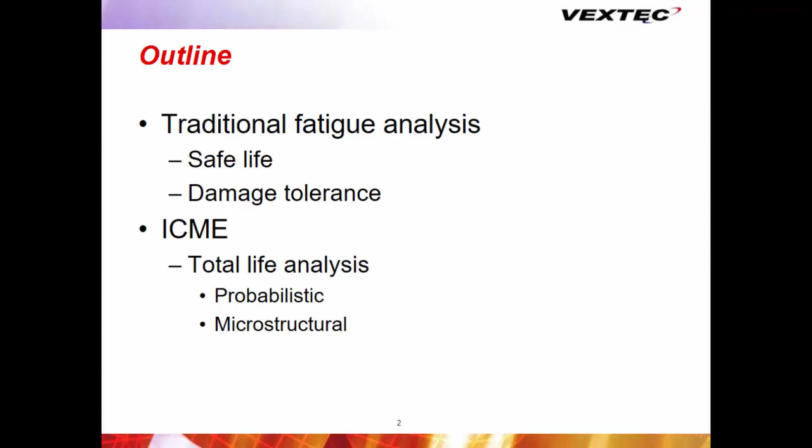So with that, I'm going to go over very briefly the traditional method, which you all know: safe life and damage tolerance, and how those work into an ICME-based method, which is more of a total life method. In ICME, ideally you're going to model the material as an initial set of discontinuities. There's no equivalent initial flaw size. You're trying to model what's fundamental in the material itself, and how that culminates in the generation of dislocations, fatigue cracks, and so on.

So the traditional safe life method, going way back, is we pull on a bunch of smooth round bars or notch bars. We plot those against stress, and then we find some life as a function of stress and/or strain. One of the problems is there's a lot of scatter. Even if I take a smooth round bar and polish it the best I can, I've had graduate students do all the polishing they can just to get a mirror finish, and I can still have huge orders of magnitude difference in something as simple as a smooth round bar. I can have 1, 2, or 3 orders of magnitude difference in life on what I think is an ideally similar bar.

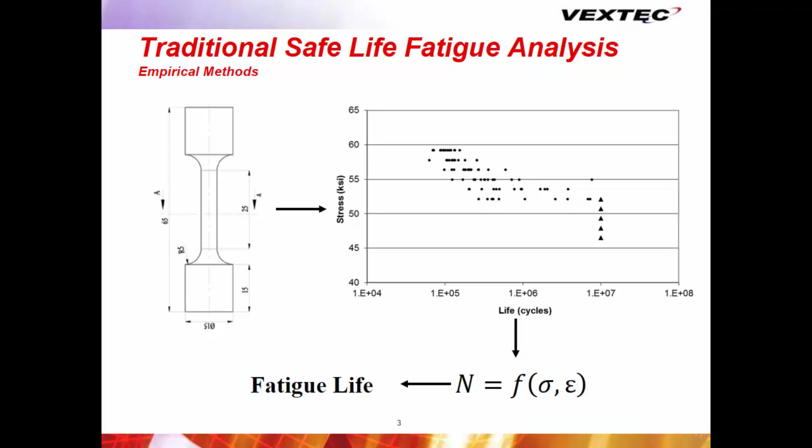And that's because stress is maybe not always the fundamental driver for what drives fatigue itself. So if I go back - and I'm not a fatigue guy, I had to learn this in the field, I worked for Ford and GM, they just stuck me in the fatigue group there - I dug up my undergraduate book on fatigue, which was Professor Shigley's book.

If I go to page 188, Professor Shigley said, as an undergraduate, I need you to understand that if you find the fatigue strength of a test component, which is S sub E prime, and you want to relate that to the fatigue strength of what you're putting out in the field, well, here's the equation he has on 188. There's all these knockdown factors - all these rules - and he says in the text you will learn there's very little correlation between what that bar tells you and what you're going to experience. So he says you're going to spend your life trying to figure out these Ks, and that's what every company does.

So it worked at Ford and General Motors - we had different Ks. Basically our design system, our standard work design, is understanding these Ks. And these Ks aren't always based on science, they're based on our experience. We had a certain failure many years ago that got a K driven to this, and now we're going to use that K, and then that person no longer works there, and I don't know where that K came from, so we're going to lose that K. It's just constantly rolling around to reinvent the Ks. And it keeps us all in business, so it's not a bad place to be.

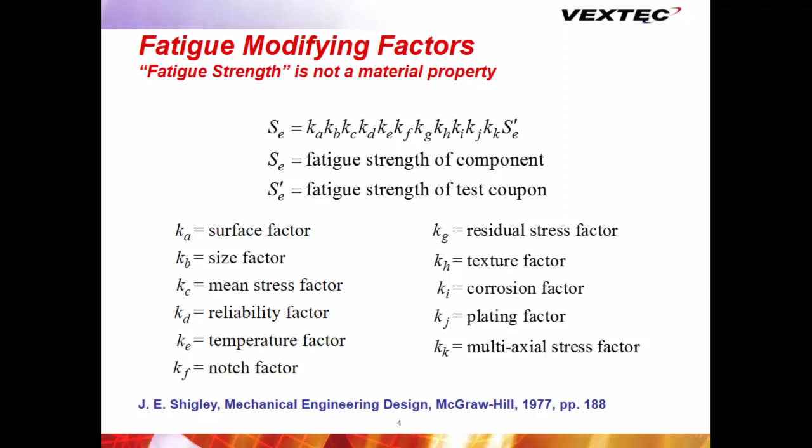And we're going to do that, and then they keep saying we want it lighter, we want it hotter, we want it cheaper. So then these old Ks don't work. If you want to make something lighter, I'm going to make it out of aluminum instead of steel - okay, now I've got to go figure out all my Ks again. So is there a better way to do this? And that's where the whole concept of ICME comes in. So here's another thing.

So why should I, when I put a notch in a bar, why should it change the fatigue strength? Well, because the fatigue strength is not a material property. The SN curve is not a material property. I don't have an SN curve for steel, I've got an SN curve for steel with a notch in it. If I change the notch size, I get another SN curve. So we have to get out of this thought that there's an SN curve or an endurance limit for a material. No, that's dependent upon all of those other K's.

Now, indeed, we've got Glinka methods, we've got Neuber methods to capture notches, but still I have to do tests. To get my parameters in those, I've got to test, and I've got to test multiple notch sizes and stuff. So it boils down to I have found ways computationally of accounting for notches by doing tests.

But can I capture that scatter with tests? Because if I look at my smooth bars, ideally, there's places where I've got a lot more scatter than on my notch bars. And I understand that the notch bars have got a lot less area being stressed and stuff. So I have a basic understanding of that. Can I put that in a computational form?

In other words, can I model a notch bar and a smooth bar with the same material properties and get the correct answer? Can I capture the notch? Can I capture R ratio? Can I capture even corrosion fatigue? Can things come in there? And ideally, at a mechanistic level, if I understand the mechanism, which we often do, we spend a lot of time understanding damage mechanisms, how can we work then to a computational, integrated computational framework?

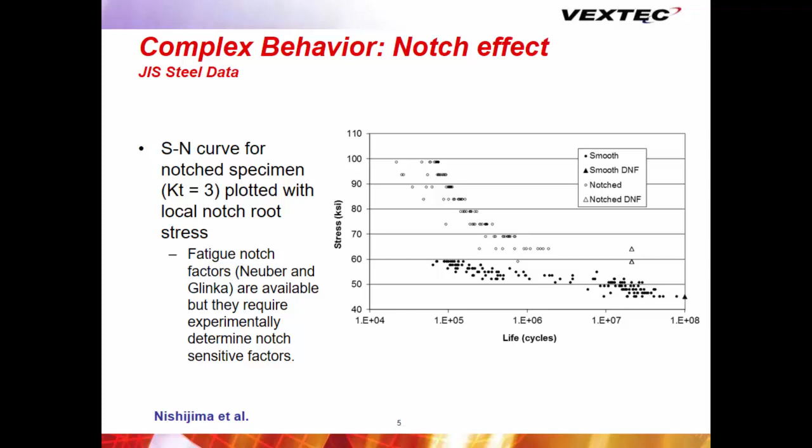So it becomes very important, especially when we're going from these very small test specimens to things like bridges and other big things. But the flip side, going from a test specimen of a solder joint down to the solder joint that exists in an integrated package, where there's a huge difference in those sizes too, going down the other way. So how can all of these things be captured as intrinsic material properties?

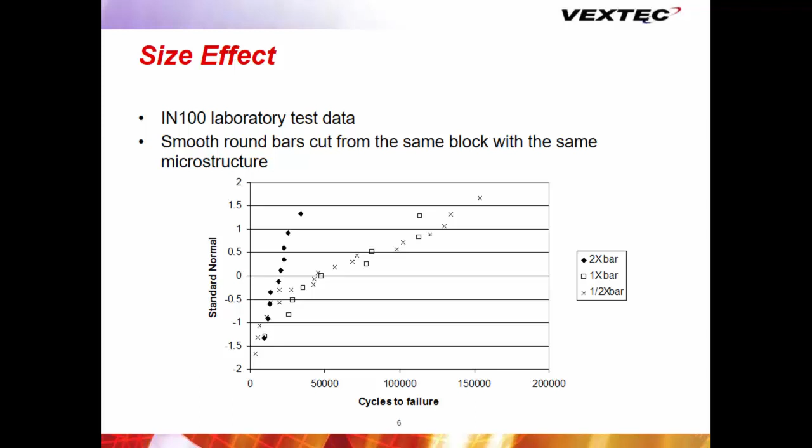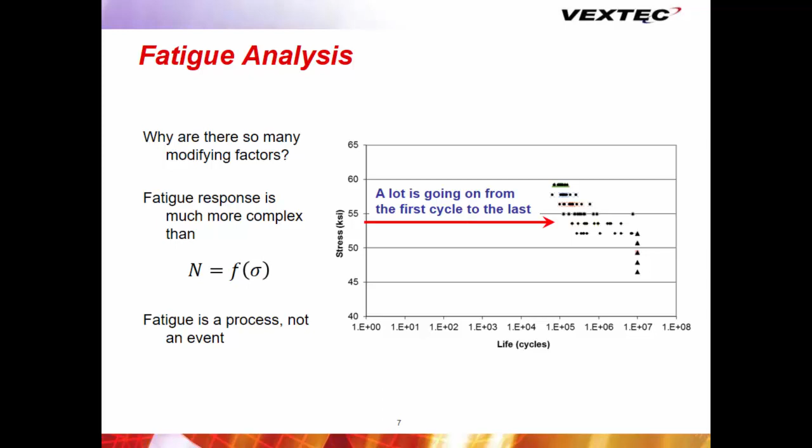And so what's really going on, which is what everybody's talking about, what the Professor talked about, is really there's a lot going on between when I first load that thing and that thing cracks, or I get the failure in the SN curve. And to understand that SN curve, I've got to be able to model or understand what's going on. So fatigue is a process, it's not an event, it's not that I hit a 5% load drop. There's all this stuff that's going on, and can I understand what's going on to get me to that end event? And then maybe I've got a chance of capturing why those dots there are where they are. And that's the whole concept behind the total life analysis, all the work that Professor Topper has spent his life on, the work people were talking about here earlier this morning, understanding the fatigue process.

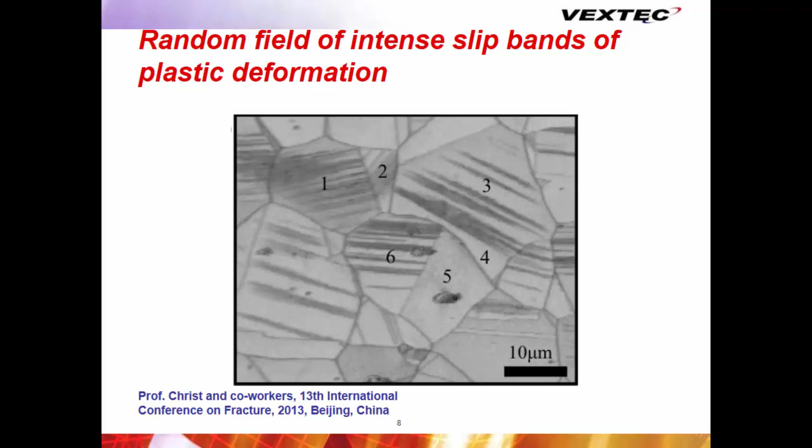All those things are available using statistical volume methods, which have been around for a number of years, but they've become much easier to use now that computers are faster. So we actually have the computational capability to run models of something like this, modeling 100 million grains. A piece can have 100 million grains in it. If we look at it statistically, we can actually model 100 million grains because you're not modeling each grain, you're going to the tails of your distribution and actually doing models of those tails.

And then here's another example. This is a bolt hole in a longeron on an aircraft, and you see there's a bunch of little dinky cracks. Aluminum 7000 series, that's how it accumulates damage, it's got a bunch of little cracks. This is going to pass inspection. This is a perfectly good hole.

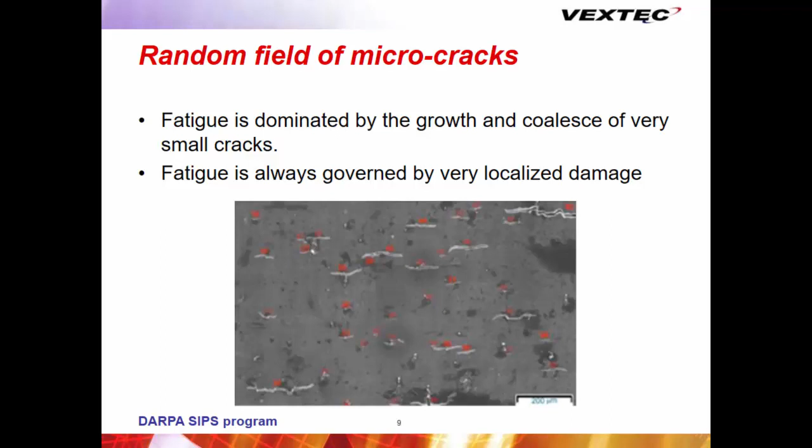And I know most of you are driving home this evening, but for us that are flying home, this is what we're flying on. They're there, and we allow them to be there, but we need to understand them to life that aircraft. We don't infinite life airframes, they're limited life, we inspect them, they're damage tolerant, but understanding what's going on here is necessary to understand when I need to do the inspection on that aircraft. And we can model this. If there's a whole bunch of cracks on that aircraft, billions, can we model billions? Well, actually we can, using statistical methods.

And then here's another example, kind of from that first one. Here's a crack as it starts to get long, but it still recognizes that the microstructure is there. As a matter of fact, the microstructure is going to drive the crack growth until the process zone, the plastic zone, is so big that it can average out all those microstructural inhomogeneities. But at very low loads, it might always be microstructurally driven. The important thing is not so much that it's got this tortuous crack path, but that tortuous crack path drives the rate. So two of these cracks can have much different numbers of cycles to get to a certain small size, because of tortuosity.

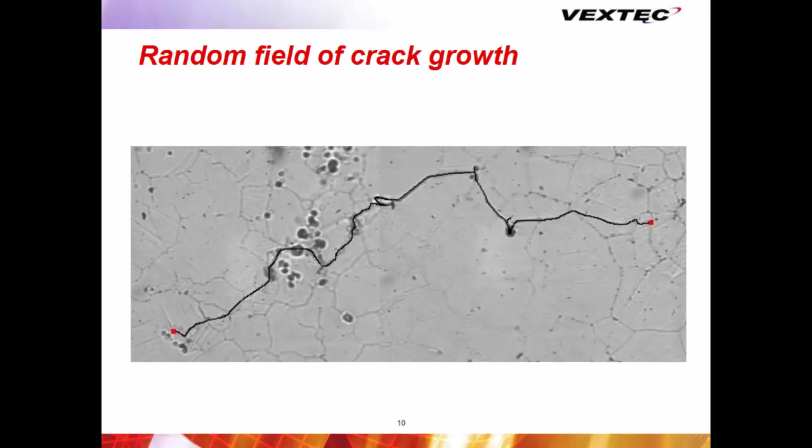One of them could take one path, one takes the other path, and as you know, driving around Detroit here, the path you take determines when you're going to get there, and that's true for these cracks also. So can we handle that? Well, using statistical volume methods, yes, absolutely, and it's fairly straightforward. The hard part is to create the statistical volume method, or the software to do it, which people have done over the years, and then it becomes engineering knowledge. What rules do I need to put in there that are going to allow a crack to look like this?

So that's where the computational material models come in. These computational material models actually try to model the material at some fundamental level. So if slip's driving the thing, let's look at slip. If voids are driving the thing, let's populate with voids. If it's voids and slip, put all of those fundamental discontinuities in the model and let damage grow from each and every one of those in this system reliability type model. So it's important that we get the randomness. Size is very important; the larger something is, in general, the lower its life is.

But using this, we can go back and look at our test coupons. We can take data from the test coupons, not just the end life, but look at the fracture surfaces, understand where the crack started from, and we have that now. We have automated methods to put our specimens in these little RoboMet type things, and it'll go through and scan the fracture surface for us and give us that. We've got a lot of methods out there that can automate this.

So take that one bar that we broke, and that's a jewel. There's all kinds of data in that one bar. Look at striation spacing, you know, some of that stuff can be done now. It's much easier to do now than it was 20 years ago. And take one broken bar, but just wring all of the information out of it and make sure all of that information gets into our fatigue model.

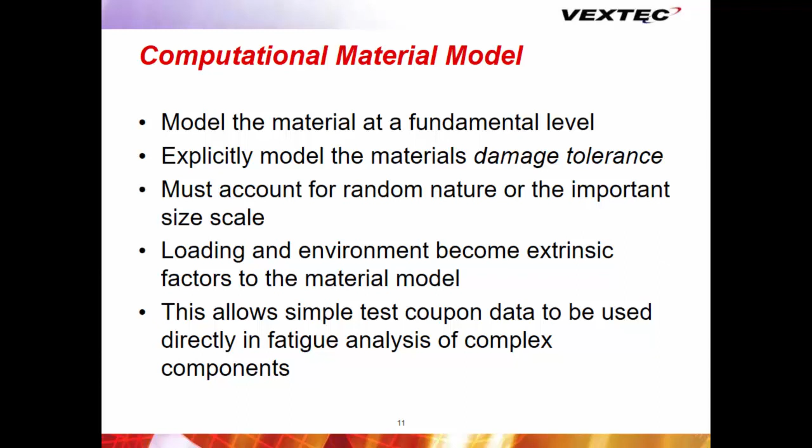Most all of these methods are damage tolerance based. They're not linear elastic fracture mechanics, but damage tolerance based, where you're actually modeling cycle-by-cycle the damage that builds up. The reason they're not linear elastic fracture mechanics was shown this morning - that could be the last 20% of life, and for nickel alloy it's the last 1% of life. So by the time you get to a large crack, you can be almost over with life.

So if you want to capture that 80% that happens before then, you've got to use small flaw fracture mechanics, dislocation theory, crystal plasticity. All those models are available, and the journals are full of all kinds of models available for us. How do we take that knowledge and put it directly into our fatigue modeling?

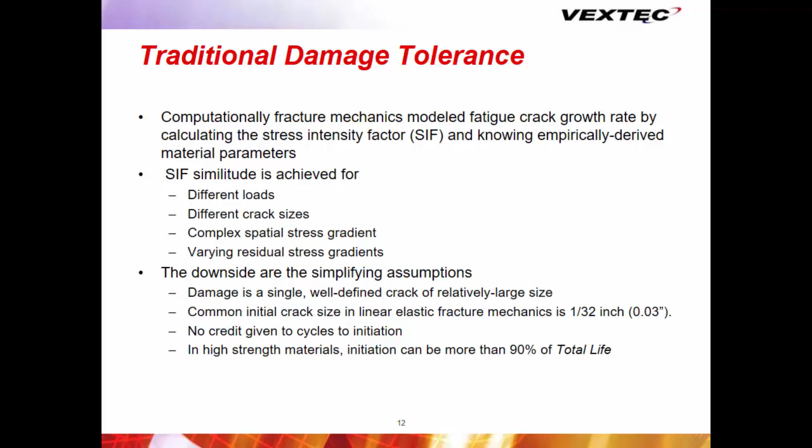So kind of the way to do that is - here's an example of a statistical volume element, a little chunk of material. It's got say 500 grains in it, and those grains all have their own orientation. There could be voids in there, hard inclusions in there, whatever they are.

But they're statistically defined, so if I take my next chunk of material, it won't look exactly like this, but the statistics will be the same - the mean grain size is the same, the scatter in grain size is the same, as long as I'm in the same region. If I get to another region, especially in a casting, I might want to change up the statistics in my statistical volume element.

But that element's available as an element, and then I've got crystal plasticity, dislocation theory models that allow me to generate plasticity through a dislocation. I was going to say Bilby-type models, Tanaka and Mura, the stuff that Keith Miller worked on for many, many years. There's many models out there.

The difference is that this crystal plasticity happens over a single grain. It hits a grain boundary, it's going to get pinned to that grain boundary, but then it's going to go on to the next grain boundary and the next grain boundary. And that happens over and over.

And then there's small flaw fracture mechanics. So in a nickel alloy, you might define your initial crack as when it busts through the first grain boundary - that's your initial crack size. So you've got these very, very small cracks, but you've got to use small flaw fracture mechanics to get those to grow. And finally you get to linear elastic fracture mechanics.

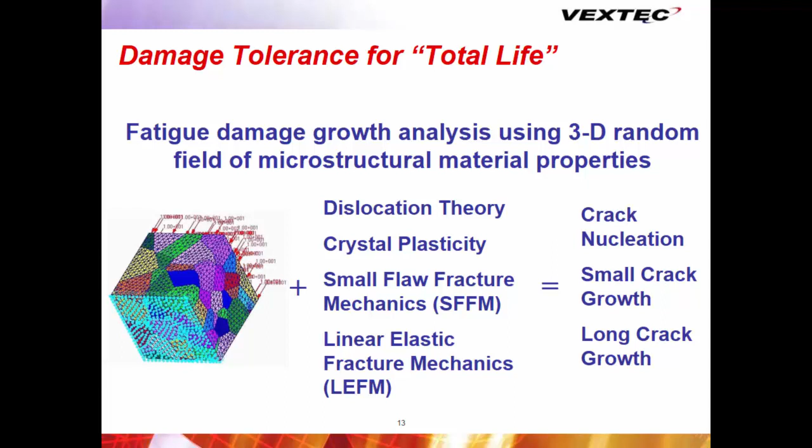In some components, that's a long time. In aircraft, we design to give us a long crack growth life because we're going to go look for cracks. So once we find them, we've got to have some life after that. Other components, we don't have any life, or we aren't going to look. So do we really care what the long crack growth life is if we're not going to use that in assuring safety?

So very, very quickly, I think it was talked about early - all of these models are based on what's going on in front of the crack tip opening displacement. How much is that crack? What's your delta crack tip opening displacement? So closure comes into these models. Overload, if I get an overload, it's going to hold the crack down. So it's modeling the plasticity in front of the crack, and that plastic zone goes over multiple microstructural features.

So it's the microstructure that exists in that plastic zone, and that plastic zone could vary depending upon your math. Up close to the crack, you could have one set of plasticity. Further away, you've got another set of plasticity. Finally, you get the elastic region, which sits out there.

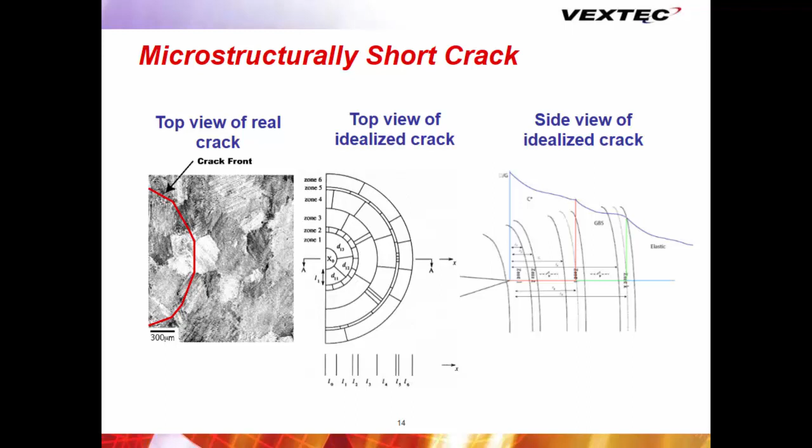Again, there are many models for that, and what goes on in aluminum is different than what goes on in steel. Stainless steel is different than martensitic steel, but stainless steel is very close to what nickel and aluminum is, actually. But people know how that plasticity forms, and there's computational models out there that allow that.

And so kind of how that works is you can take your finite element model, and at each element in your FEM, you kind of find a life for that element, and then you look at the other elements, and that can roll on. But the important thing is you get down to the end where you've simulated many of them - you can start to simulate what you expect to see in a fleet of these.

So if I make 1,000 of these, when do I expect the first one to fail? So that's kind of there. But the other important thing is, if you're an FE Safe user, which you are in this room, can I use this to take a small amount of test data and simulate a large test program?

So I'm going to go around and bust 5 bars, but I'm going to look at them very closely, see what my failure mechanisms are, and then simulate those using engineering knowledge.

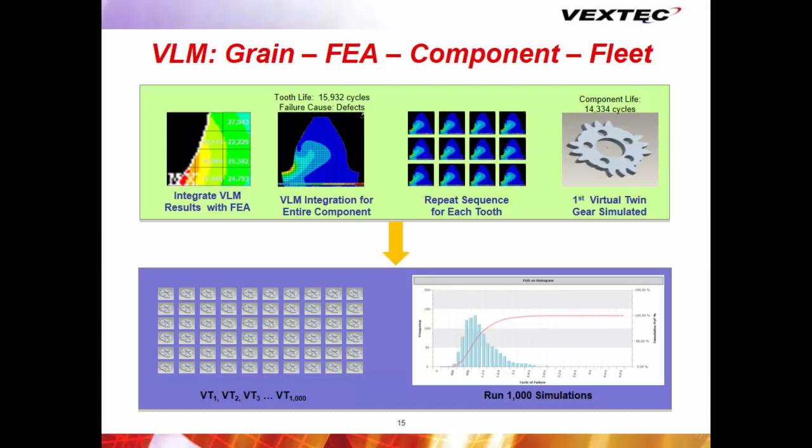I know I can have a casting pore as big as X. Let's put one in there per cubic foot of this stuff and see how that drives things. Things I can never test for because I can't test that many bars, I can do that and create my SN curve.

Can I take a few bars, look at them very closely, and using these methods simulate a bunch of bars? Can I capture my -3 sigma curve, or my B10, whatever is in my standard practice? Can I knock down the amount of testing I need to do to get the data to go in my standard practice?

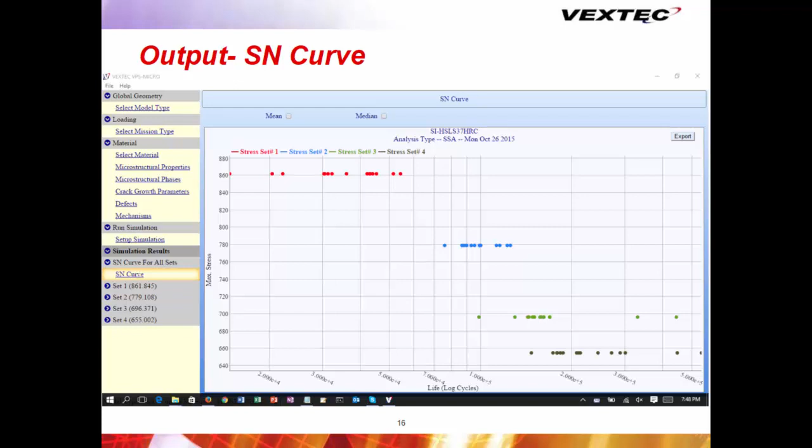So you have to change up the entire practice to use ICME and say, okay, I'm going to do X tests, and those are going to cost me a lot of money. Well, for just a few dollars more, I can look at those much more closely, and get myself a much richer database, even a safer database to put into my traditional standard design practice.

Because this is a simulation, we're going to simulate those outputs. What does the fracture surface actually look like? Well, it's a simulation, you've simulated that. So the simulation output is going to tell you, okay, I've got a grain over here and it's at a really high orientation to my applied load level. It's a very strong grain, or I've got a pore over here that was in the crack path, and I can compare that back to my actual fracture surface.

And this is where the V&V comes in. How do I validate? This is a pretty high level. Does my simulated fracture surface look like this? This is the crime scene. Can I match the crime scene? And if not, at this level, I can go back and I've got to tweak my analysis, but I need to match this crime scene.

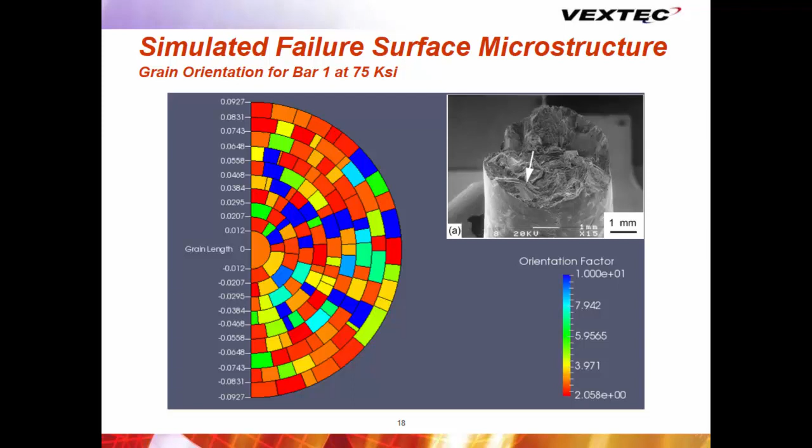If my fracture surface, stochastically, not individually, but if I don't capture the proper statistics like the initial pore size where the crack started, all of those things can be captured, and I go back and calibrate my model such that I capture this. And then I can start looking at my crack growth rates themselves.

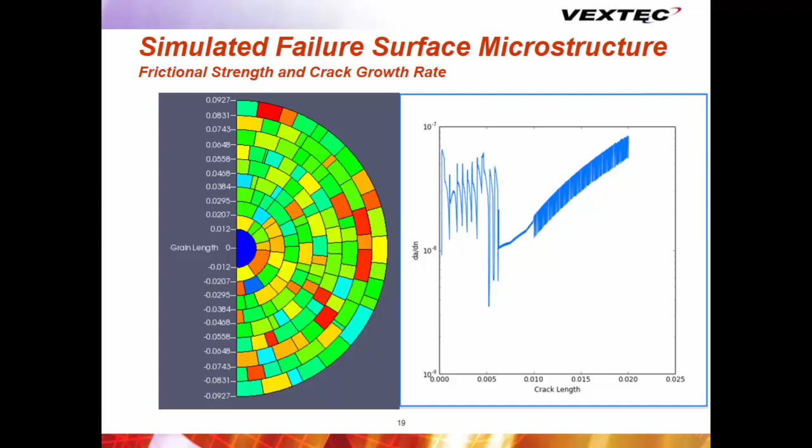So say I was, as Professor Topper was doing, if I wanted to step up the plate and look at my actual mouth opening displacement during the growth, I can go back and find it's all over the place when the crack is small. Does the model show that? Is the model similar to what reality is?

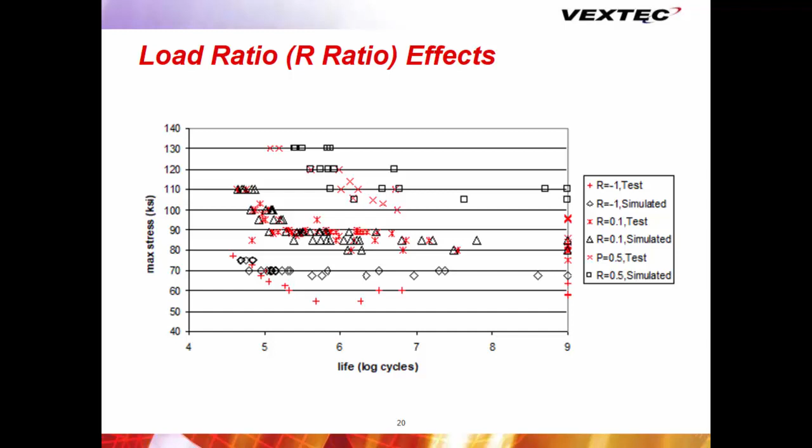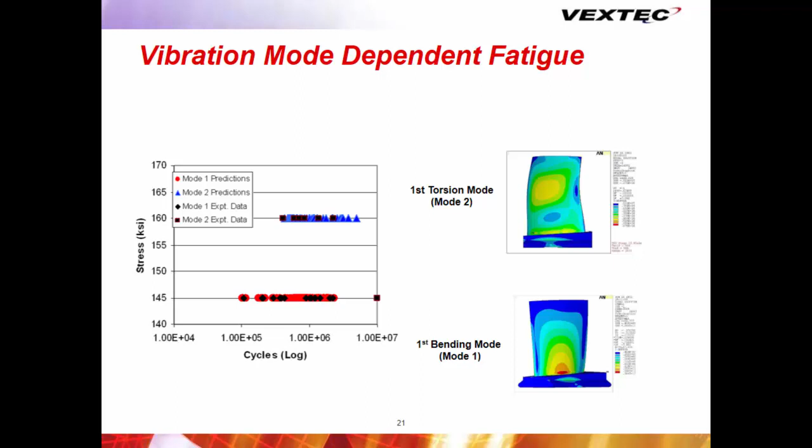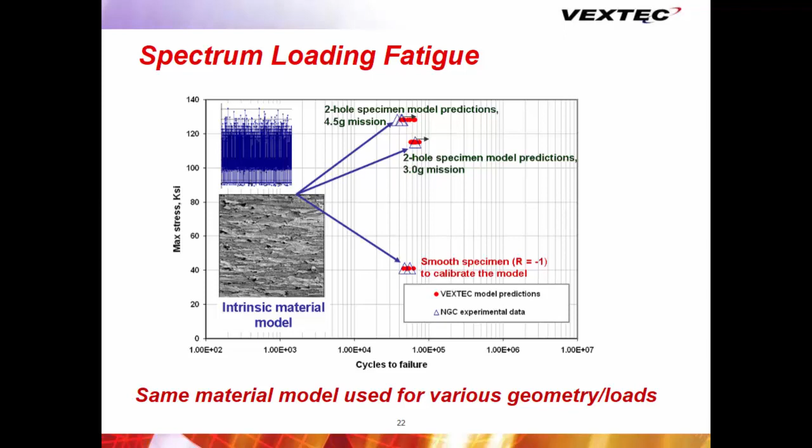So with that, you can capture things like load ratio effects. There's some experimental data with some simulated data. Vibration, going from the first bend mode to the first torsion mode, it's a totally different volume of material vibrating, so you get a significant uptick in your allowable stresses in different vibratory modes. Spectral loading, talked about this morning, you're going to capture that because when you load it up, you get that residual plasticity and you're capturing that also. So can you capture things like spectral loading, going from simple loading to spectral loading?

And if I've got something like an engine block, I've got different material at different locations, so I need to be able to capture that too. Can I segregate my model, and also, I might have material data on one or two different flake sizes - can I simulate the other flake sizes that exist in my gray cast iron? So I don't have SN curves for them, but could I use this to simulate what they would be?